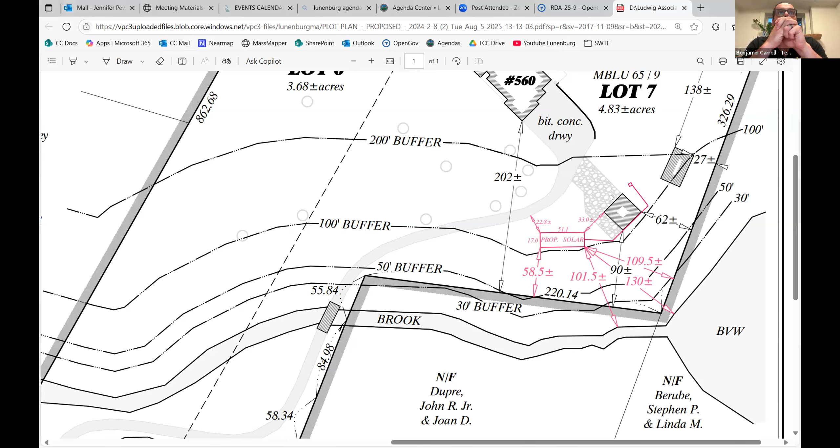There we go, cool, I see it now. Yep, so... any questions? So, we have - I don't see any erosion controls on this plan.

Just for everybody in the commission, this is the house right here. There's a very long driveway with a covered bridge on it. If you're looking at the house, to the right there's a barn, and then looking at the barn to the right would be the solar array. It's on an already disturbed lawn. I actually have a couple pictures of it that I can show.

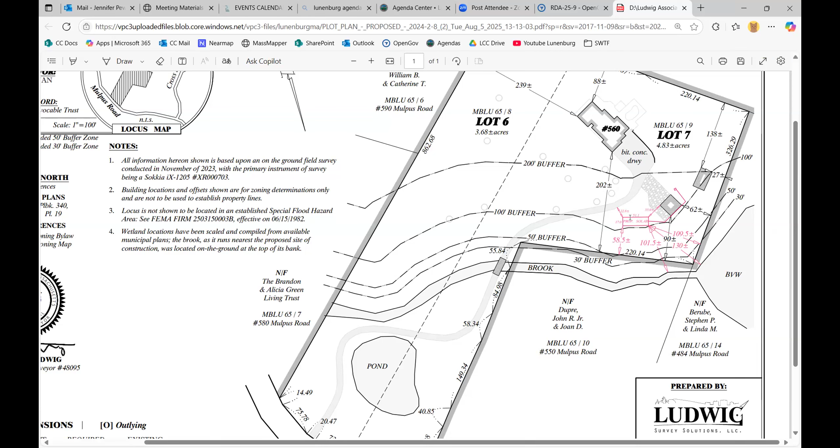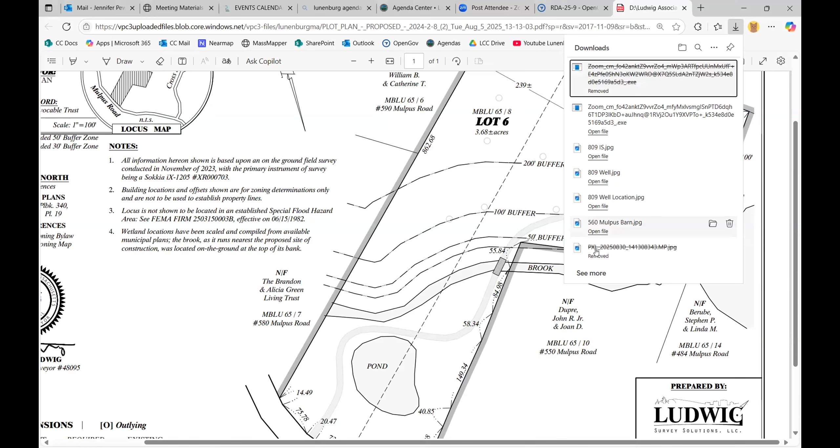Let me... so that's the barn. Madam Chair, the barn didn't show. It didn't? No, we were still looking at the drawing. I shared my whole screen - let me share my whole screen again. But I actually wasn't going to show the barn, I wanted to show the actual area.

I spoke with the applicant, the homeowner, while we were there, and it's right in this area - there is a slope going down. So like I was saying, for the plans we'd like to see, our administrator asked that we do a double erosion control there. She'd like to see a straw wattle with a silt fence for an erosion barrier. I was just saying straw wattle with the silt fence. Okay, let me read her other notes.

Do any commissioners have any questions about this property application? Have you brought some pictures, Madam Chair? I haven't seen a picture yet. Oh wait, it didn't show? No. Did anyone else see the picture? I saw a picture of the lawn. Yeah, it's on my side. Yeah, I saw the lawn picture. I'll share it again.

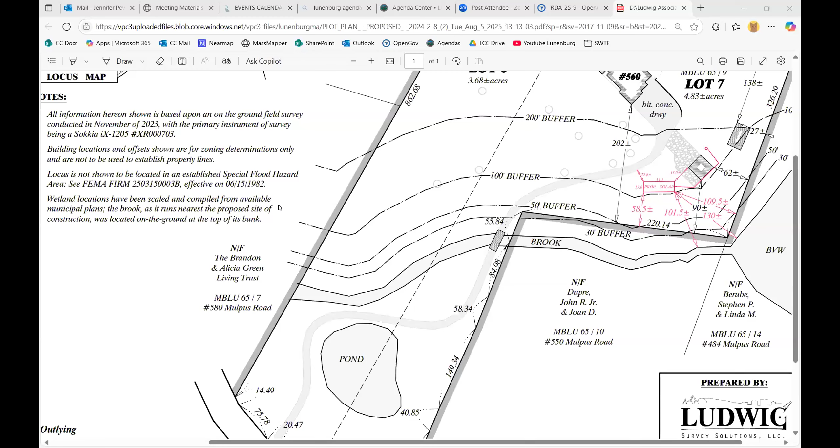Let's see, wetland locate - let me reshare my screen here. I just hate to verify wetlands that haven't been verified. Yeah, that makes sense. I don't necessarily have a problem with the solar being installed in this spot - it's currently outside of the inner riparian zone, given that the brook is sited properly and there is absolutely no BVW off of the brook bank.

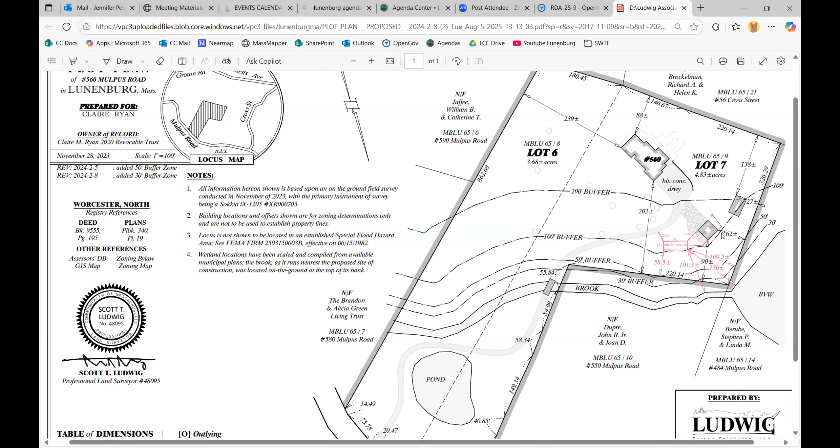So if we're looking at the plan, wetland locations have been scaled and compiled - you guys can see this, right? Scaled and compiled from available municipal plans. The brook, as it runs nearest the proposed site of construction, was located on the ground at the top of its bank. So the brook is here - again, we're not sure, this is from the available municipal plans. And then there is the BVW right here.

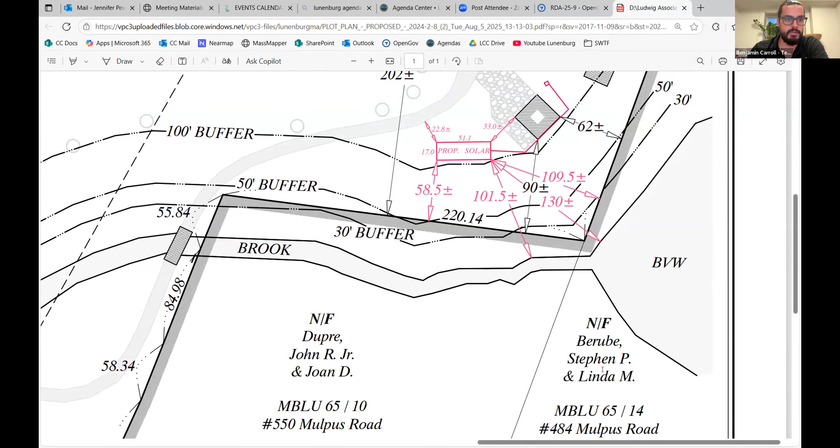Okay, do we know what plans he used to site the brook? Can you answer that, Benjamin? I'm not 100% sure. My team has put this together - we do a lot of projects, so I'm not sure exactly. I haven't spoken to exactly who put it together. I'd have to check on that. Let me see if there's anything else in the meeting docs.

And how are the panels going to be supported? It's a really nice simple technology with ground screws - you do ground screws into the ground, and then you post up from there, and it's a simple racking system.

Okay, and the wiring will be overhead? I don't see any groundwork from the array to the house. There's a trench from the array to the barn. Okay, and is that on the plan? That is on the plans.

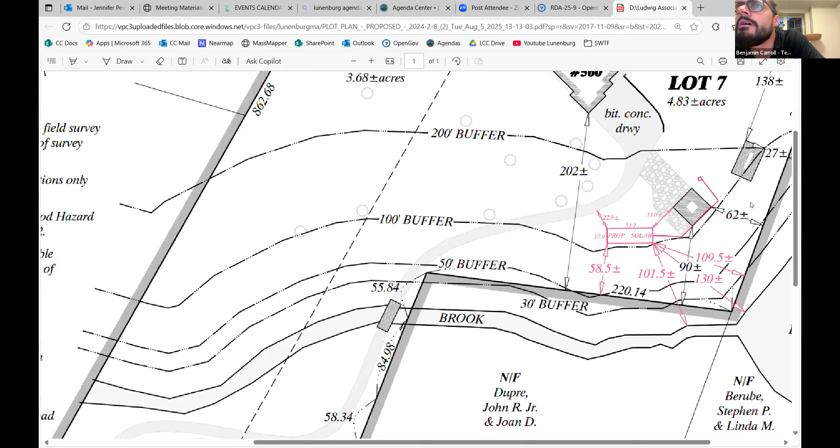Let me see. I believe it's shown right here - yeah, I believe that's it. Although there might be - that's just a dimension line. Oh yeah, see the other one, the other red line right here. I'm not sure why it's terminating to the left side of the barn, but it should just be going into the barn from there.

Okay, so we'll need to add the erosion protection to the plan, any groundwork, and call it out on the plan. And how does the power get from the house to the barn, or from the barn to the house?

There's a conduit that has a pole line, I believe, that we're going from, because the barn has power already. I believe there's either a meter on the barn or we're pulling through from the barn there. I think I have a picture of a big power panel next to the barn. Is it on a post? Could be on a post.

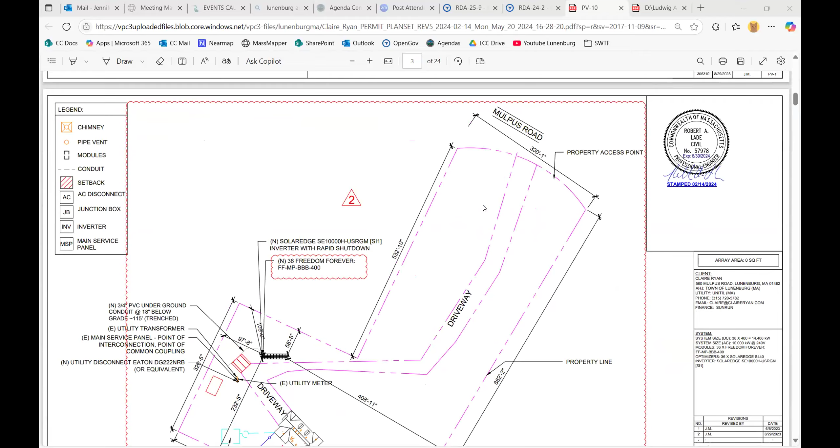I'm not sure 100%, I can't see what you guys are necessarily looking at, so I'm not sure. Let me, yeah, so I'm just looking in OpenGov, Jenny. So they have an RDA 24-2 and then they have the RDA 25-9, but they both have the same submitted plan. Okay, but this is the plan I'm seeing in 24-2, which looks a little different. That's a totally different company too. Where are you seeing the one?

So when I went to photographs, oh, attachments, photographs, let me look at their site plan. Oh yeah, this is... okay, yeah, so this one has no wetlands listed on it. This is just the design plan. It looks like the PV10. Yeah, so this is the survey record.

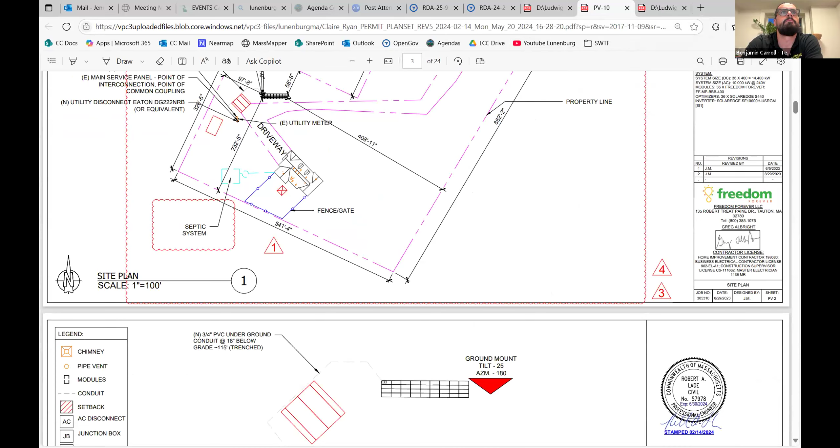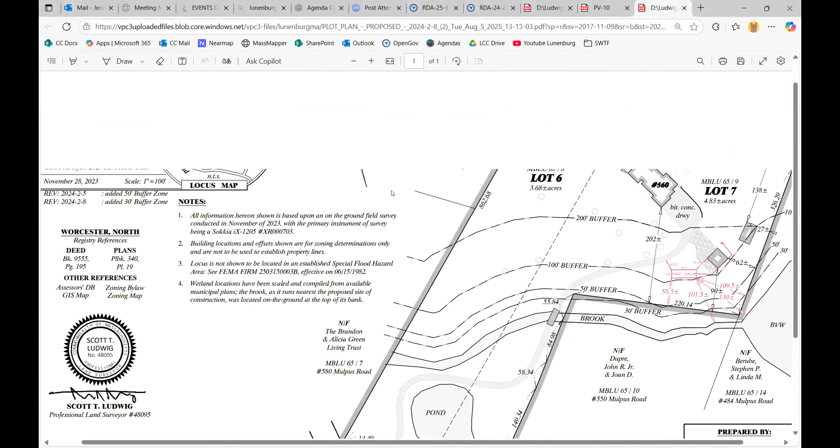Yeah, so then if you went to photographs in the uploads, that's the plot plan with the buffers. Yeah, so this is... so it is definitely prepared for Paige Pereira. And this one says prepared for Claire Ryan. So is it the same?

Let me look at the stamp here. Are you kind of breaking up? I didn't hear anything. Yeah, look at that. They just changed the name on the plan, but it's the same plan.

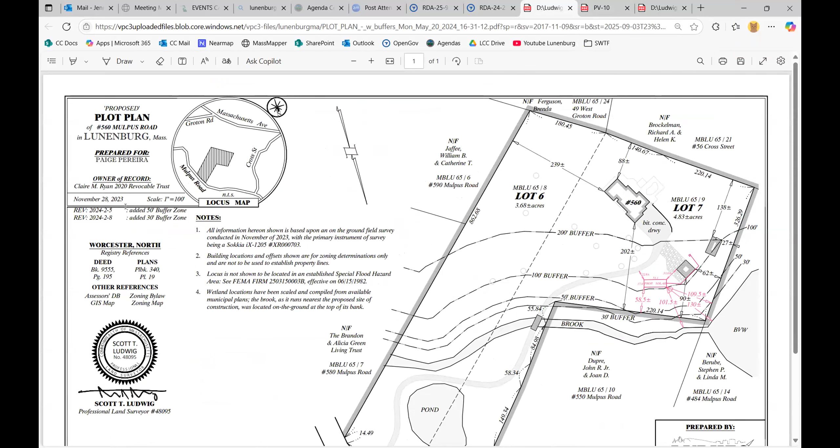I wonder if it's the... so it might have been this the first homeowner that provided that, maybe. No. Yeah, so this is I think prepared for it's - Paige Pereira. But it shows the owner. And then has two revisions.

What's the revision on this one? Same revisions, yeah, added 50 and added 30. Seems old though. Where's...

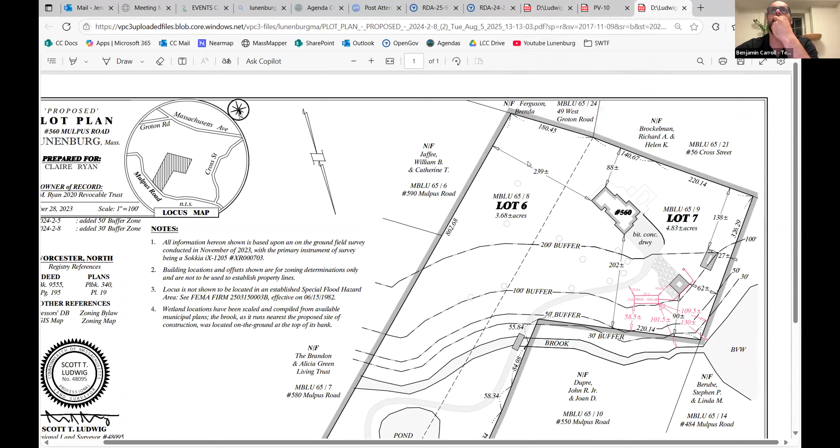Because originally you had said something about an 8 kilowatt system, but it's not an 8 kilowatt system. Whatever we had with the zoning board, I'm not sure if that's in there. That is the correct one. Let me see.

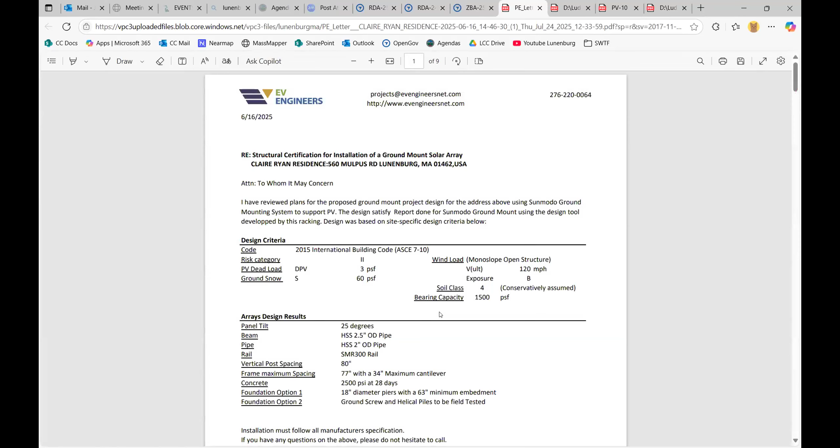So, zoning board appears to be that same plot plan. It's not the one we were looking at. I don't know if something got mis-uploaded. They have building plans. No, it's just the engineering doc.

Let me see if anything extra was uploaded.

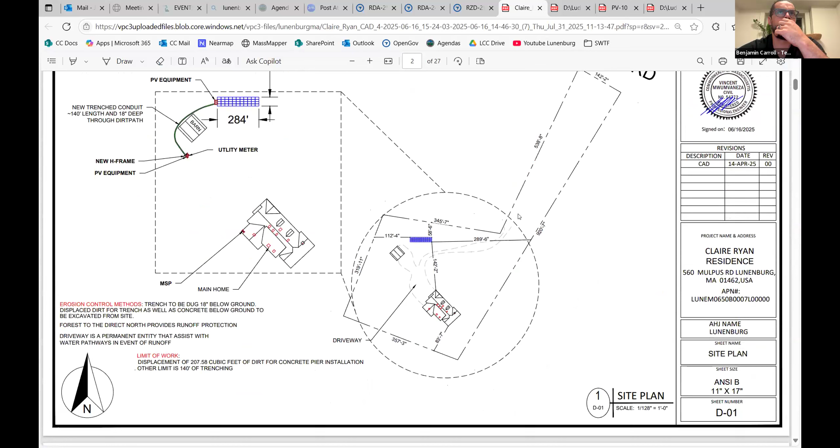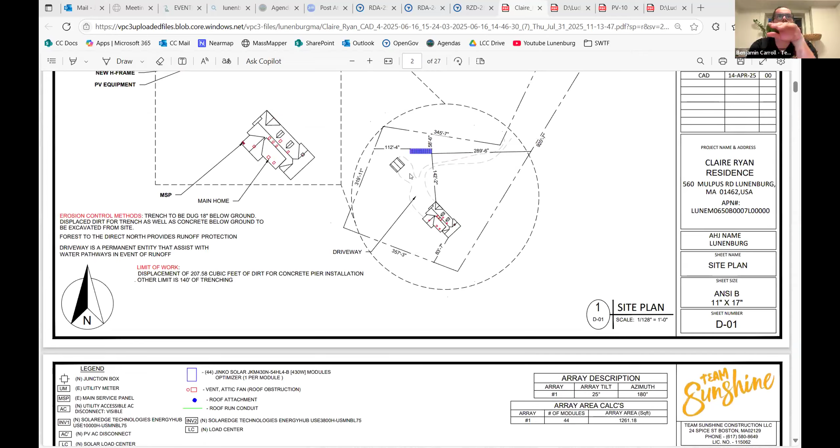This doesn't have anything wetland related that is correct. That's the correct design though. That's the one we've been working off of if you guys want more information.

So there's no buffer zones on this one at all. So it's an 18.920, which is—oh, I had 8.920, so that was a typo. Oh okay, there you go.

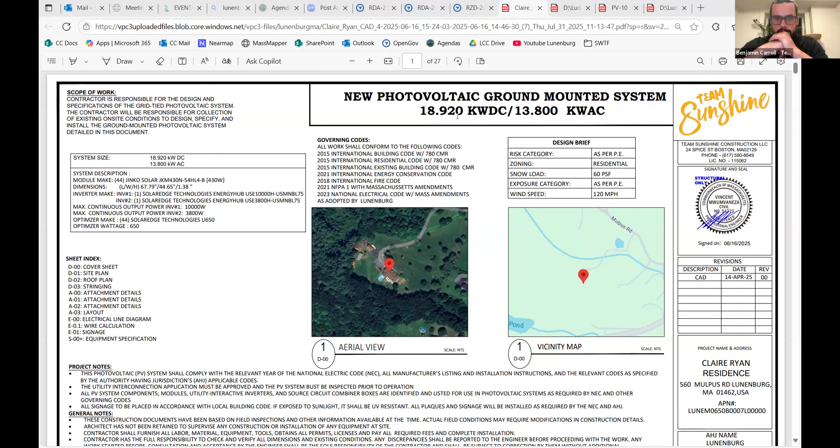So Richard, what are you thinking about all of this? So I guess at this point, I would recommend that we continue. The applicant can review the site plan to ensure that the 51.1 by 17.0 is the accurate footprint of the system. They can call out the trench with a little more detail, and they can place the erosion protection probably at the 100-foot buffer zone.

Okay, can you bring that up again, like the one that we're working off of? Yes. Yeah, because unfortunately, we've already approved an RDA that kind of sets the buffer line, the BVW line.

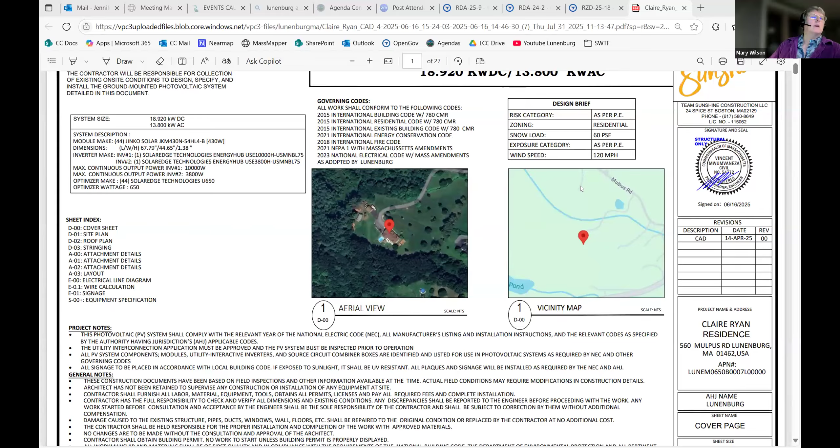I have a question about that, Madam Chair, if I may. Yes, absolutely. So, I'd like to ask it of Rich through you, if you will. Rich, I was clear that if we approve an NOI, that it sets the wetland for the next 3 years. I was not clear that that was true for an RDA. Is it? Honestly, I don't know if it is or not.

Okay, so err on the side of caution. I would probably recommend erring on the side of caution. Yeah, that's something though that we should be able to find out through the circuit rider or Herlin between now and the next meeting, I think. But it's a good thing for all of us to know. So thanks for bringing it up, Rich. That's a place where it was gray and fuzzy for me.

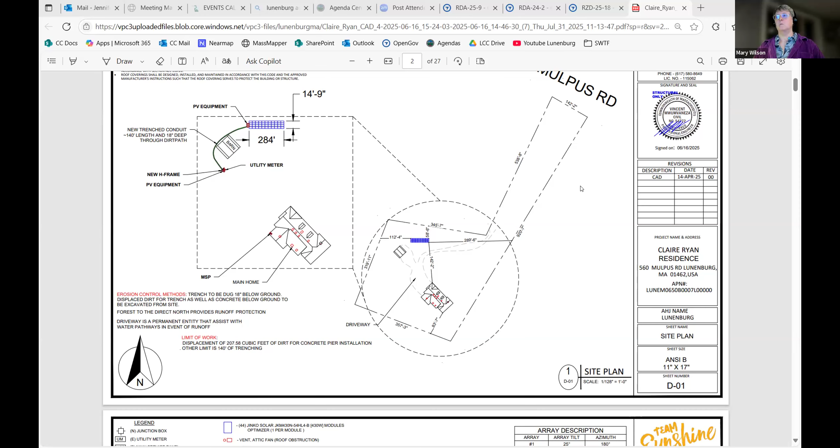Yeah, because unfortunately with the Mass Mapper, you can kind of see the brook bank, and it's lawn after that around the driveway. But this is definitely a forested area on the neighbor's property, so it could very well have spread and been a forested wetland. So that would change some of the dimensions, which would put some of this construction in the inner riparian zone.

Yes, all good points. Yeah, currently it's outside, so but if this is a smaller system, they may not need as big of an envelope, or the design may have changed and the envelope may have changed. So we just want to make sure that their plan's accurate.

Can we go back to the plan that originally we were looking at? Because I think the trench and everything is actually accurate. I'm just trying to wrap my head around and make sure that we're all on the same page. Because we also are kind of running into some weather considerations here with everything that's going on too.

Like, I don't want to install ground stuff too late in the season. So I want to try to do everything that we can. I'm with the straw wattle and the silt fence, whatever we got to do, let's do it. I just want to make sure we're on the right page, because I think that does show where the trench is going. And then—

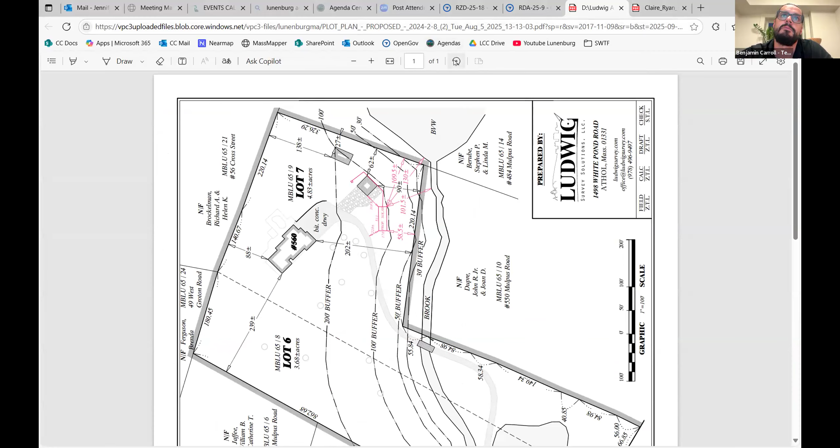I think we just need to figure out what is this one. So see the red line that's coming out of that solar system and then wrapping around the backside of the barn and then terminating where we saw that electrical box. That is where the trench is going.

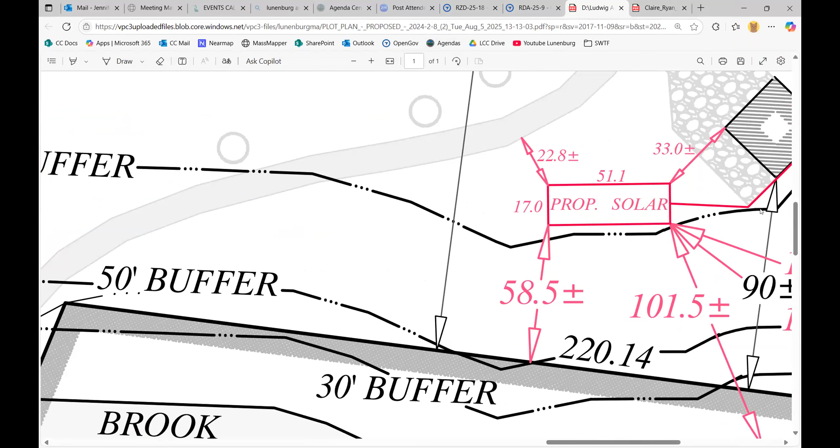Yeah, that right there. This one? Yep. So it goes from the system behind the barn, wraps around and connects to that electrical box. Okay, the one from the picture, yep. Yeah, so that's in the 100-foot buffer.

What else do you get? So then we need to put the silt fence and straw wattle on that 100-foot buffer. Where do you guys suggest we put that? That would be my suggestion. Place it right on the 100-foot buffer.

Okay, so looking at the plan, start from 30 or 40 feet to the left of the system and go all the way around. Probably to that second building thereabouts, where you're going to be digging a trench all along the backside there.

Okay, beautiful. So with that kind of plan in place, is that kind of where we're at as far as we need the double straw wattle silt fence on that 100-foot buffer line? Is that the idea? Yep, and call out in description the trench and whatever you're going to put in there for a casing.

What do you mean? Right now it's a red line, we don't know what it is. Is it going to be a 3/4-inch conduit, a 4-inch conduit? How deep down is it going to go? Is it concrete? Is that something you guys need to determine, because typically we're just going to do what's code for this. Is there some additional considerations you guys need for the conduit and everything?

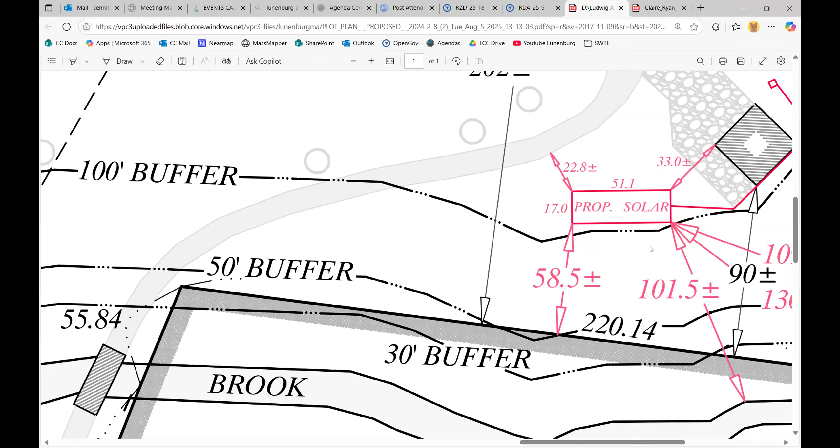Well, no, just explain what you're doing, because we're not the electrical board, so we have no idea what the codes are and what to expect there. Yeah, it's 18 inches, schedule 80. Yep, just put it on the plan.

Madam Chair, if I may - Commissioner Birch is asking for those additional details, for the clarity of the applicant, because there's a lot more soil disturbance that happens with a 1-inch pipe versus an 18-inch pipe versus a 2-foot pipe. That I think is really the heart of the matter, is us being 100% clear on how much soil disturbance there will be in these buffer zones.

Well, no, I know that 100%. It's 18 inches down, and then you have about an inch and a half PVC.

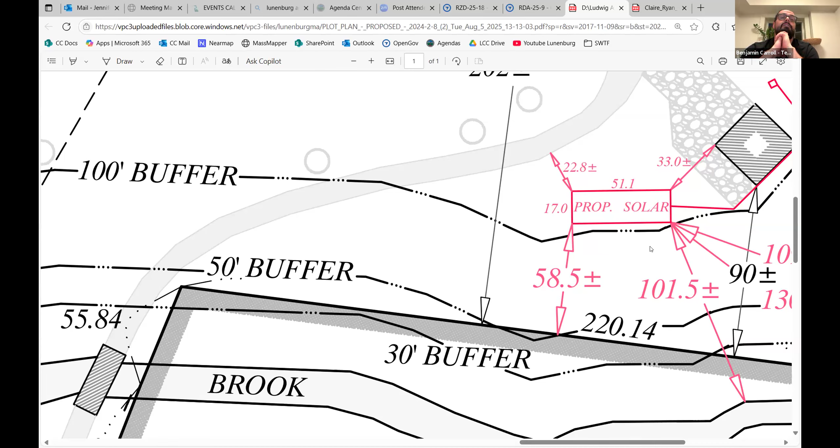Having that kind of detail on a drawing makes it unambiguous for us when we're looking at it. On what plan? Because this is just for this, but when we have the electrical permit and stuff like that, it's on the electrical plan.

Right, but typically all that's been submitted to us. And I'm aligned with Commissioner Birch in wanting to have drawings that are unambiguous. Thank you, okay.

Unfortunately, we're not basing our permit on other boards or departments in town because we don't have access to any of that. We have to base our decision on what you submit. This is all we have in front of us, this is all we have to enforce the permit moving forward. So if it's ambiguous and we don't understand what's there, if somebody calls it out, there's nothing on the plan to say this is what it's supposed to be. So we need to make sure everybody understands what's being applied for and what's being approved.

Do you guys know when the next meeting is? Just because I'm trying to help this homeowner out. September 17th, 2025. Okay, all right, so we just got to put the straw and wattle, and then the size of the PVC and trench.

And then Richard, as far as the delineation, I would just ask Herlin, if she gets a chance, to go out and verify that the BVW is at the bank, top of the bank. She should be able to do that fairly quickly. If the brook looks like it does under the driveway, it should be pretty straightforward. But unfortunately from Mass Mapper, it's all treed, so you can't see the brook.

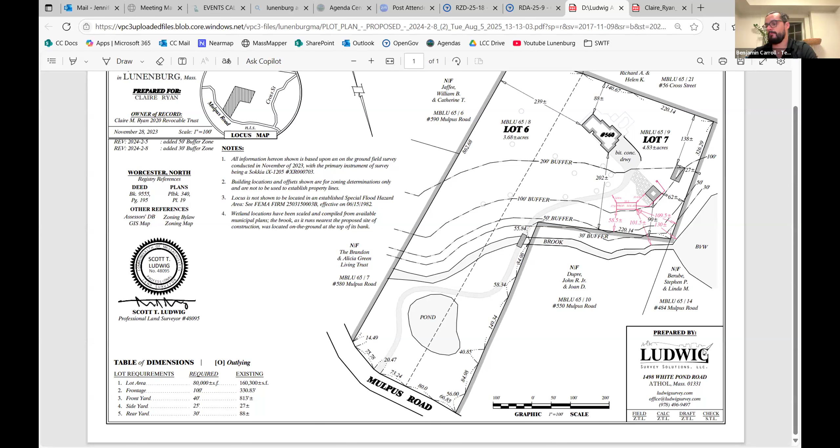Okay, thank you. Thank you so much, appreciate it. Thanks, have a good night. You too.

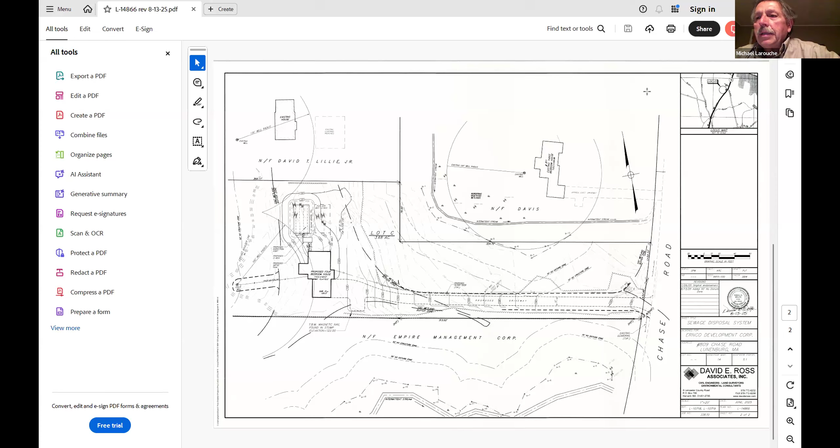Yeah, nothing I've done made a difference, but I just want you to know I'm relying on you, and I'll figure this out, but I don't want to slow down the meeting just because I can't see something. Do you want to try popping out and popping back in? Yeah, let me try that. Good idea, thank you.

Okay, so while we're waiting for Mike to come back in, did we have any other comments, questions, or suggestions for the applicant's representative, or anything we'd want to see?

I guess I did have one more question, Madam Chair. I see one single callout for erosion protection. Can we clear that up a little bit? Because I would imagine they're going to have erosion protection along the driveway if there's still grading or blacktopping, and around the existing well, and that finger into the 100-foot, and then along the 100-foot line in the back.

So you're asking to have that all put on the plan? Yes. I think I see one on the north side of the proposed driveway, but I don't see any other erosion protection running along the 100-foot buffer line, where you have limit of fill going inside the 100-foot, or the work for the existing well and the digging of the water line. Are you able to see my cursor moving?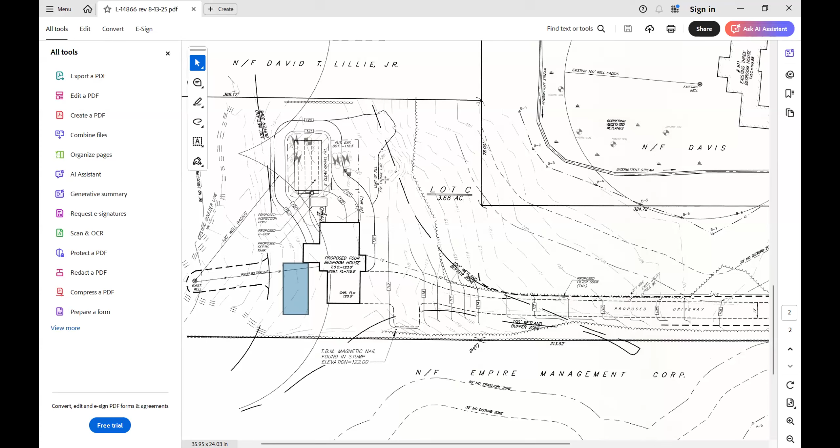Okay, and it does look like you've got some fill going into the 100-foot buffer to the east side of the septic system, with a fairly steep gradient down towards the wetland. No, let me correct that. That line is shown on this septic plan as required by the Board of Health in the event that the future expansion is ever utilized 20, 30 years in the future. Okay, so that's just for Board of Health compliance, showing that any fill that might be needed would be contained within the lot. Certainly, if that were being done now, we would also be addressing that.

When I do look at the site, the site's been cleared. So myself, I would like to see the erosion protection on either the limit of work or the 100-foot buffer line.

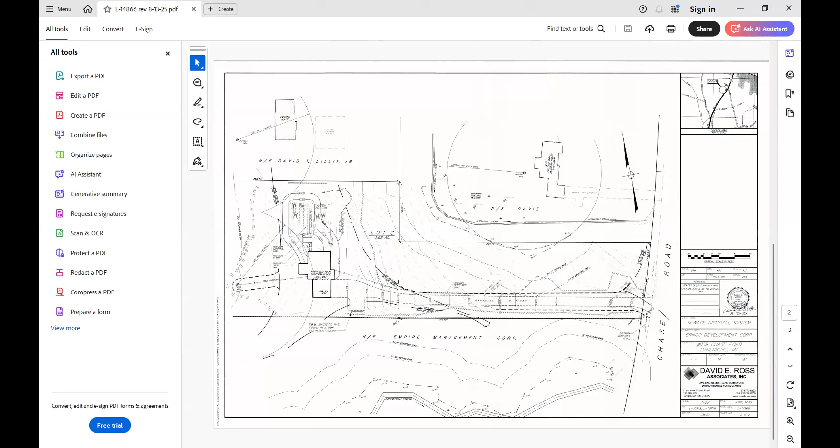And just for clarification, if you call out the different zones of work, you've got one line that starts and finishes on the north side of the drive. Put one on the south side, put one around the...

I have to admit, I'm losing track of where you're talking about, because we've captured any disturbance in the area of the driveway, capturing any erosion and sedimentation heading north. We're also doing that on the south side of the driveway, where any potential erosion would be heading in a southerly direction. So we're capturing all avenues of erosion from any portion of the driveway in the gradient direction that it's heading.

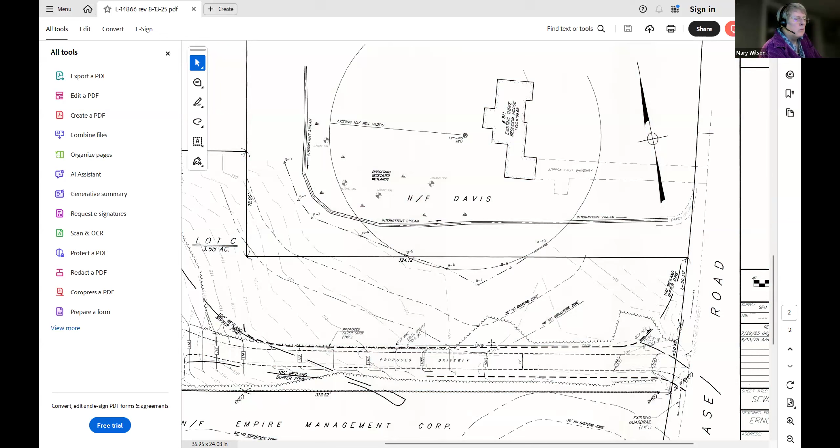Again, I can share, I still see the areas, and honestly, it looks like you've cleared into the 100-foot buffer around the septic system. So your limit of work should have erosion protection at the limit of work.

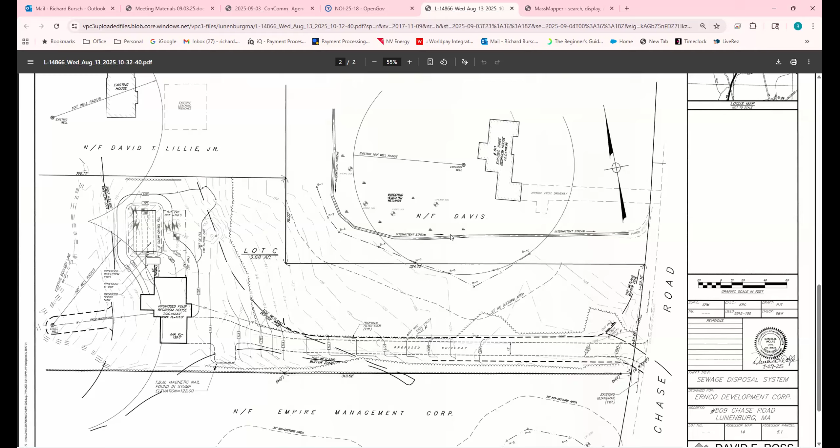Do we have any questions from members of the public? Okay, it does not look like it.

So I'd be looking for... oh, Madam Mary. Chair, I'm sorry, I was trying to double check, and I don't think we have the delineation report for this. It was part of the notice of intent. Was it included? I probably just need to get to the back of the document. Yeah, under attachment A, which came right after the DEP transmittal form. Okay.

It is nice working with an applicant who is familiar with the documents that they have submitted. Thank you very much for that. It was that wetland report that actually held me up trying to get this submitted, so I knew it was in there. Yeah, very good. And I see that it's there. Okay, thank you, I just like having them for completeness. Thank you for that. You're welcome.

Okay, so thanks for that, Mary. Do we have any other questions regarding this application?

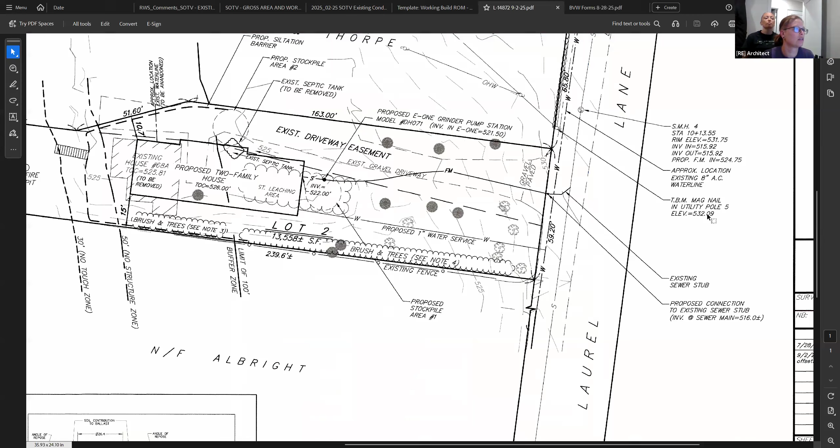So are you seeing the application? Yes. If I switch over to this tab, do you see the site plan? Yeah, yes. So this is the site plan done by David Ross.

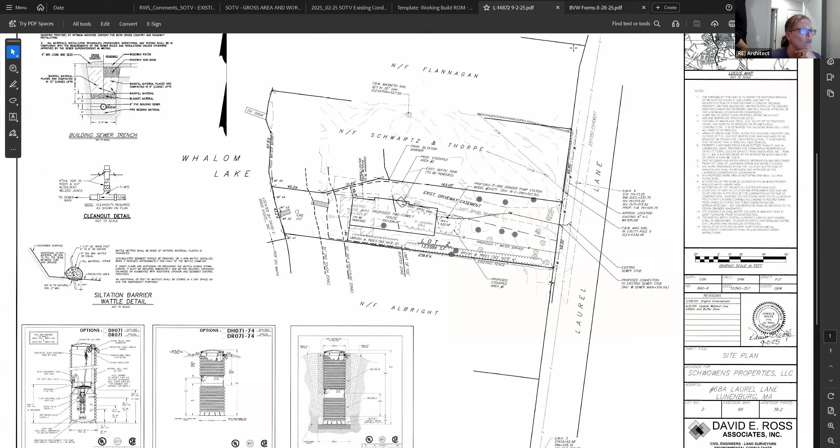I think Dan Wolf may still be in the room with us. I'm not seeing... oh wait, hold on. He's still logged on. Yep, Madam Chair, he's still here. Yep, that's okay, he doesn't have to, but it was done in conjunction with him. His crew, so David Ross came out and installed some flags and filled out the wetland forms for us. So the crew that came out 2 weekends ago saw the existing house and took some photos. It is just behind the 50-foot no structure zone. The proposal is to demolish that house and build a new duplex starting further away from the lake, about halfway through the existing house, building towards the street.

All right, is that all you have for now? Should we move on to the commission? Okay, and then this is what you submitted to the DEP. Correct.

If you want to see anything from this, you can. I'm not super familiar with it, so... Okay. Do we have any questions for members of the commission?

Can you put the plan up on the screen one more time? Sure, sorry about that. No worries. No. Okay.

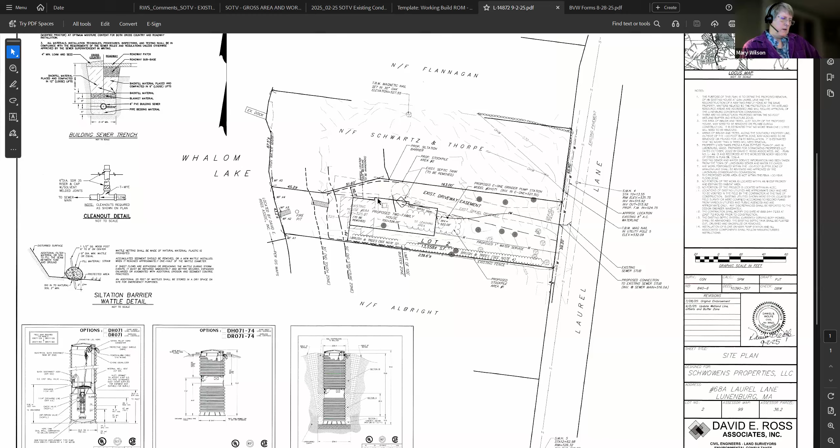One place that I'm having trouble remembering though is there was discussion about hay and straw, wattles, right? And where did we land with the use of straw and wattles? Update on that.

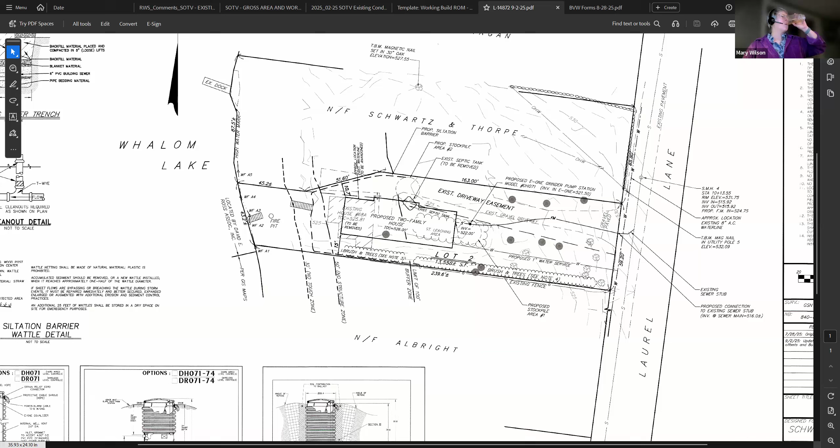I spoke to Herlin right after we had that conversation. I did let them know at the last meeting, and there was a miscommunication. Herlin said we should be using straw wattles. The message I was sent must have been just incorrect.

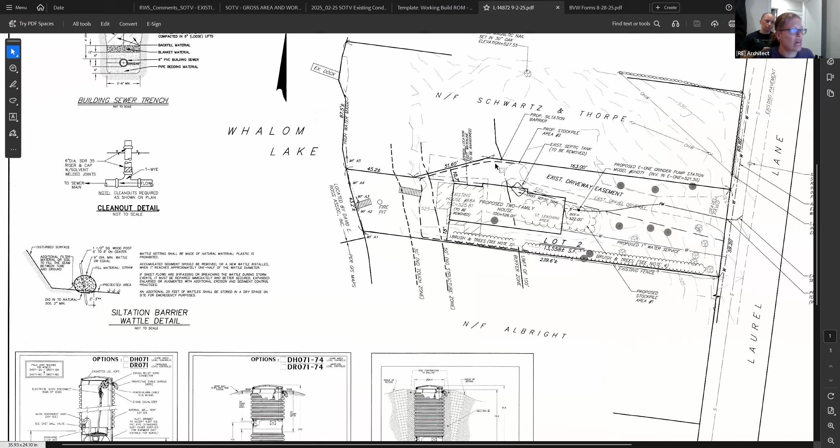So it's back on the plan now. Do we have the updated plan with the straw wattles note on it? I believe the one that was uploaded just has the silt barrier, without the straw wattles, because the message I was sent in OpenGov says no straw or hay.

But I can upload this one as well. It's in the same spot, so it doesn't move, it just adds straw to it. I would just be looking for it, Madam Chair, so that it has removed the note that says the silt barrier will not have straw wattles on it.

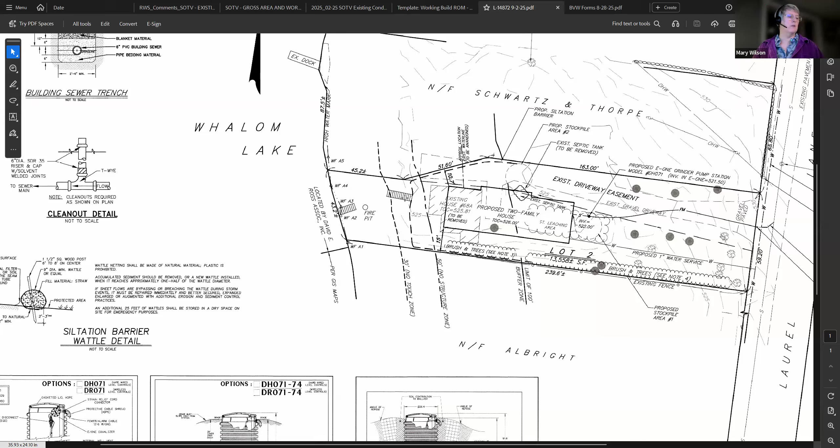So that note was the thing I was kind of keying in on. Ooh, okay, that shouldn't be there. Wait, where is that note? That note is not on this sheet. That note is not on the sheet that you have from David Ross. That note is on the sheet that I had submitted from the architect, for me as an architect.

But I can upload this one too, just so everyone's on the same page. Does that work for you, Mary? Yeah, I was just looking to see, it does have the limit of work. Is it limit of work? Where is the note about where the silt fence is gonna go?

It seems here, like, proposed siltation. So okay, perfect, works for me. We'll do it. Okay. And what it was, hay bales, I think, were what Herlin was referring to. No hay bales, and no straw bales, not straw wattles, I guess, is what Herlin was referring to. Got it.

Do we have any other questions from members of the commission? Do we have any questions from members of the public? It does not seem that we do. All right, I think I'd be looking for a motion.

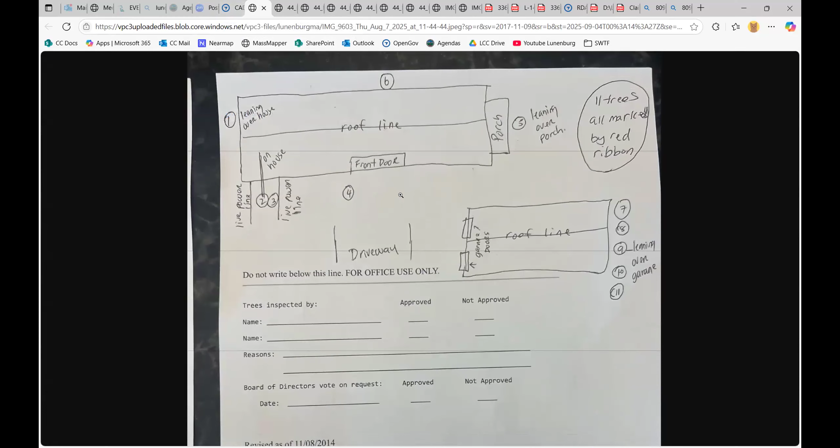Last time we were here, there was a picture that showed... that's the one that sort of outlined them, but then when Harlan came in, she added trees that she said absolutely need to be removed. So this all came on me, just because one tree fell down on the house. I didn't realize I had an issue, so this is all somewhat new to me. I'm just going with what the tree service says and what Harlan says.

But there's a ton of trees on the property. It's just these are the ones over the house or over the garage, literally that will fall on the house and the garage. And this is Hemlock Terrace. Yeah.

Gonna bring up, not the best Google Maps, but this is an aerial of the property. Not very clear though.

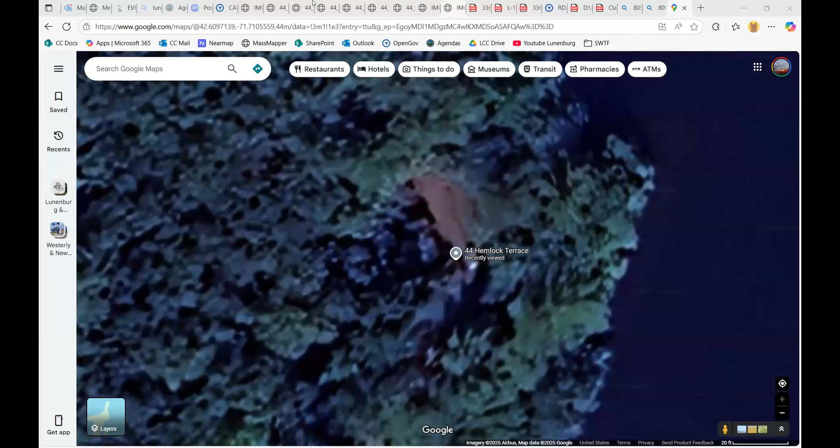So how many trees are we up to now? I know originally it was 11, and then Herlin added, she put it up to 16, but she said you really need to do 20. But I mean, they're not really like trees, some of them are like 6 inches, some are like 12 inches, but she said they're growing towards the house and some of them are dead. So I don't know how you consider a tree, is there a certain size or whatever? But when I counted, there were 20 that need to come down, but they're not like the big huge trees you're seeing in the picture.

They're just smaller ones, like some of them are probably 4 inches wide, but she's the one who pointed them out. I'm just going with what the tree service and Herlin are saying, this is not my expertise. So when you're saying the ones around 4 inches wide, see these ones right here. Yeah, and also I don't know how you count these, because if you look at the trunk, there's like 3 coming, it's one trunk with 3 branches coming out of it. Is that considered one tree or 3 trees? You know, that's what I didn't know.

Mike has his hand up. Mike, I'm just curious, are you leaving the stumps in the ground, or pulling them after? Yeah, Carolyn said I have to leave the stumps because of erosion. So you can't grind them at all, just cut them as low as they can, but no grinding. Okay, thank you.

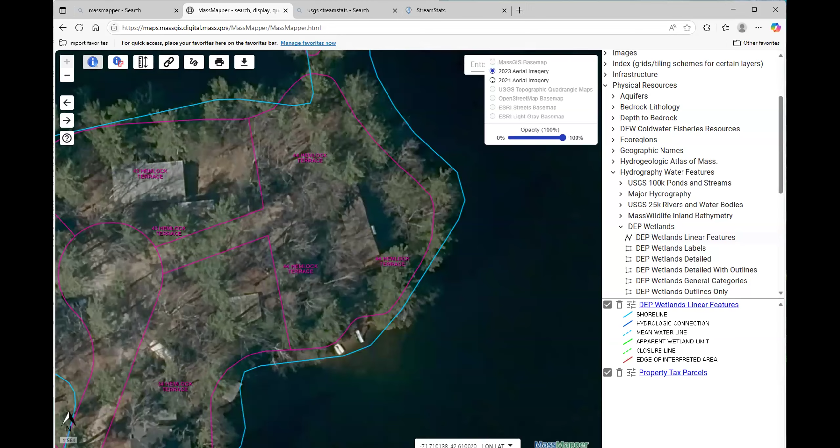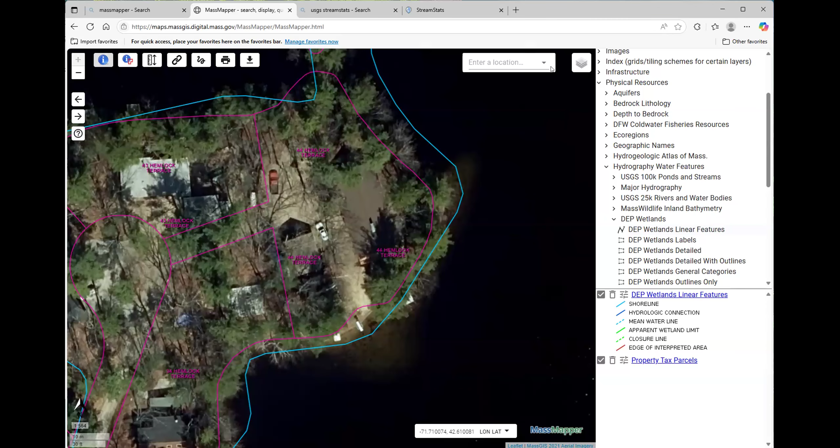These are the trees that are literally almost touching the house. We have one that's literally over the garage. So the trees hadn't been taken care of for years. The family's owned the house for 40 years and nothing has been done, and they've just grown over the house and over the garage. We're not really taking any near the water off, it's just next to the garage and next to the house. I was only proposing 11 per the tree service, but Harlan came in and said, no, you need 16 done.

So it looks like from the pictures, the trees proposed to be taken out are in clumps, in groups? Yeah, they do seem to be somewhat in groups and I don't know why. A lot of them start like from the tree trunk coming up, like it's almost two trees coming out of the trunk. There's a couple of 2 or 3 trees like that.

Harlan said a lot of them are dead. I don't know, but she was pointing to the branches showing me, saying this is dead, this is dead, this is dead. I just thought they were over the house causing damage, not realizing they were dead trees as well.

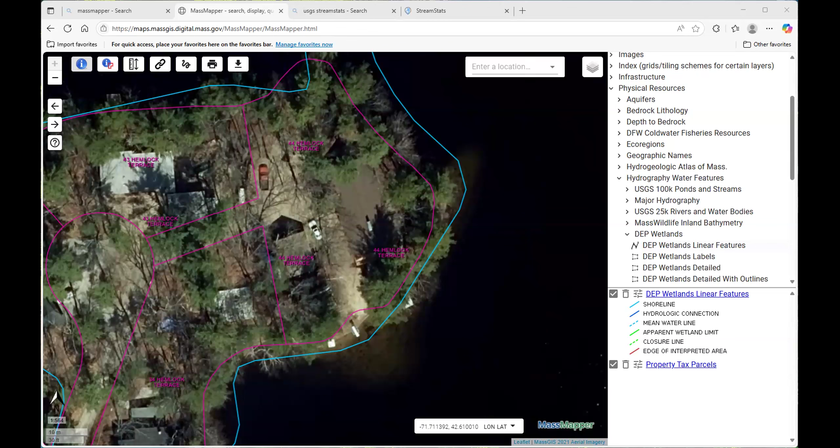Were there bigger clumps of trees coming out that might leave some sparse areas? There's really not going to be any sparse areas because there are so many trees on the property. If you look, we have a peninsula too off the side that's all full of trees as well. We're not taking anything really close to the water, it's all literally close to the house or the garage.

Richard, you have your hand up. Carol, when are you looking to take the trees down? Harlan said immediately. Do you have somebody contracted coming in tomorrow? Not tomorrow, but I was going to let them know tonight.

Okay. Yes, Madam Chair, I would like to see some sort of diagram showing the location of the trees coming down, which ones are live, which ones are dead, and a rough idea of what's around them when they come down. We wouldn't ask any less from an applicant, unless I'm missing a diagram somewhere in the application. I thought there was one in the last meeting but I'm not seeing one now. The Iron Tree Service is the name of the company, they're a big tree service.

I'm not finding anything in OpenGov under the determination application, unless I'm missing something. No, I don't think you are. I'm not seeing it either. I'm seeing one diagram that isn't really what you're looking for. I see one diagram, but I don't know what it's a diagram of.

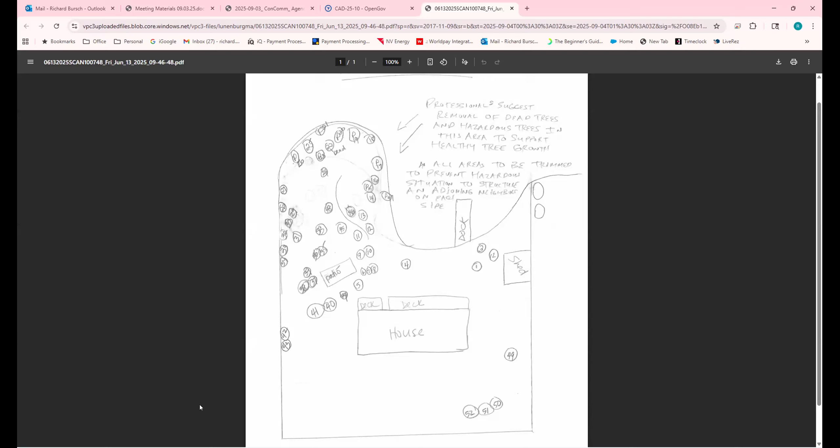Yep. If I can get the tree service in before the next meeting, call them, do it tomorrow. And if I can't get them in, then I have to do the proposal and we can figure it out again. But I say, no matter what, do a diagram.

And then whatever gets removed is on the diagram as removed? Yeah, I had the diagram before, but Harlan this morning, she added all the trees to it. So that's the difference.

The diagram that you had before, that's not the one we were showing? Yeah, just the handwritten one. Okay, I want to see like the water line sort of in the picture, so just a little bit more detailed than that, but still the simple one. Yeah, okay, I'll do my best.

Okay, all righty, thank you very much. Thanks, all right, have a good night. You too, bye.

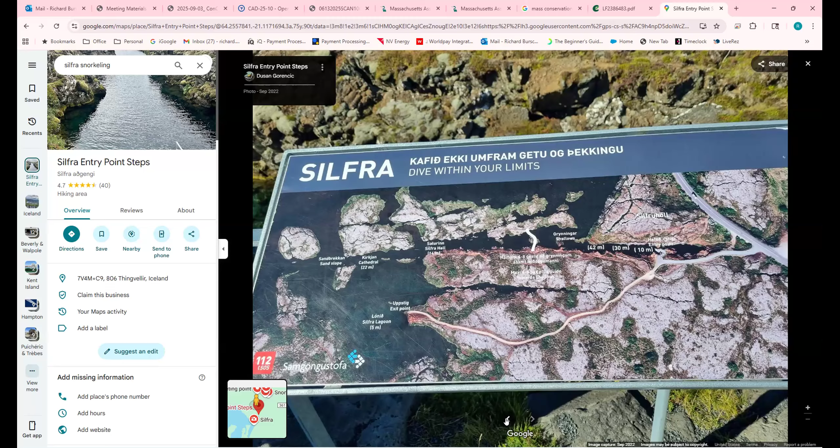See if they have any more. Is it ever warm there? I don't know, we were there in August and it was about 35 degrees.

Holy, in the water? Yes, you're in a thick wetsuit. Dry suit, actually, not a wetsuit, one that had air in it. They were dry suits, and his zipper leaked so it took in water.

That's rough, but it was breathtaking. I would recommend it to anybody, it's a quick trip.

So you must have done a rental. We rented a van and drove around, stayed at hotels the whole time. But then you went with a tour for the diving to get the dry suit rental? Yes, at the stops you can do all of the different rentals.

See where my maps are here.

One of these days I'll get to travel to all the places. You know what? Just start planning. Yeah, I've been to Scotland and Amsterdam, and Canada a lot.

Canada's pretty, depends, some of it's like Maine, some of it's just Montreal. Big cities, you can't decipher the difference between Toronto and another big city like Detroit. Toronto kind of just feels like the US, but Montreal does not, though some parts of it are a little Boston-y. In downtown it's just big city, other than they all yell at each other in French.